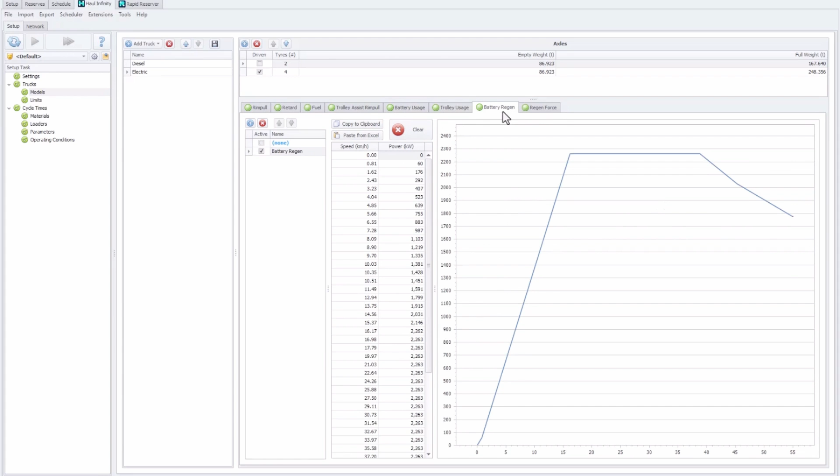Here you can see some of the parameters we use to model electric trucks, including rim pull assist, battery usage, trolley usage, battery regen, and regen force. These are some of the variables that are considered in the modelling process. You can now drill into this data when electric trucks are added to your network.

The latest development in this space allows you to add chargers to your network. Here you can see the simple process of adding a charger and how you can quickly show the impact this has on your mine haulage.

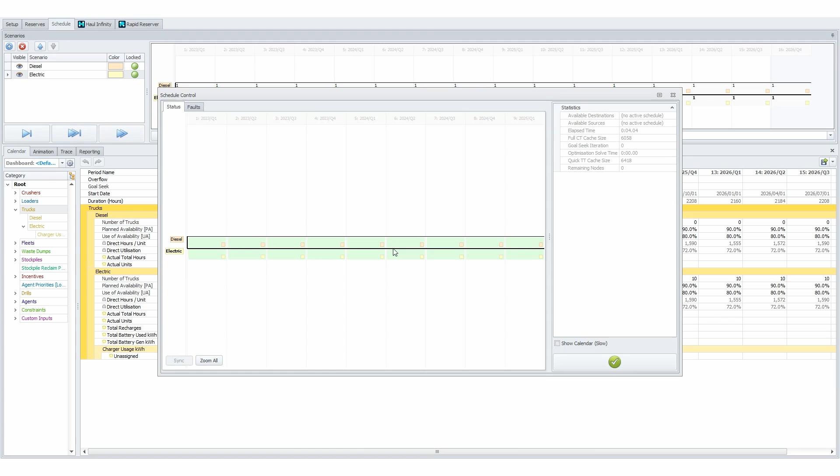Battery electric modelling in Alastri is designed to make it easier to compare your results. To compare both diesel and electric trucks, it really is as simple as clicking each truck type to view the performance over the mine schedule. Once you've run your model, you can have access to the full range of metrics and reports at the click of a button.

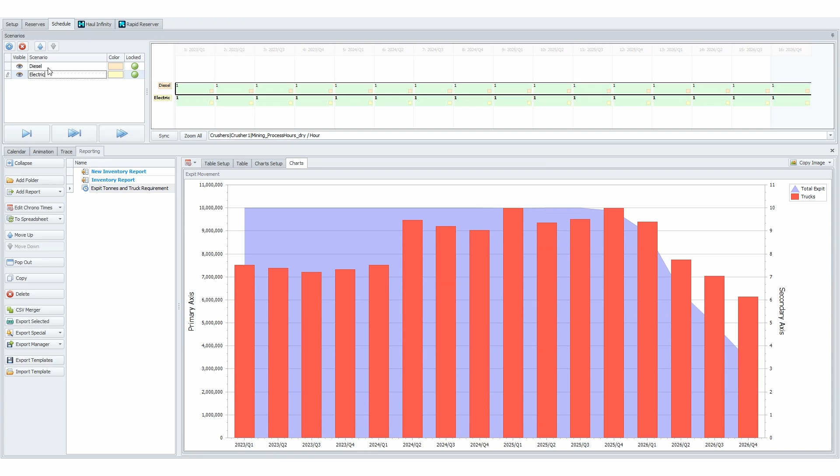Battery electric modelling was developed because a large portion of our user base were experiencing issues analysing, modelling and planning the impact that electric haulage would have on their sites. The existing methods were manual in nature and were time-consuming and were not standardised across all their sites, making it hard to maintain consistency.

Manual calculations are also subject to human error, which can lead to inaccurate results that are time-consuming to troubleshoot. The implementation of battery electric haulage in Haul Infinity makes it much easier to address these issues. However, it's very much the start of the decarbonisation journey for Alastri. We aim to expand Alastri's ESG capabilities, giving you much more confidence as you plan for the future.

While developing the battery electric haulage modelling, we identified that we could improve Haul Infinity to modernise it and better respond to the needs of our clients. Our latest release brings an improved user interface, which is now in line with the other popular Alastri products. Behind this interface, we've invested to both modernise and future-proof the Haul Infinity codebase.

The update will also make it easier to respond to new industry challenges and quickly react to future scheduling needs. One of the things that sets Alastri apart from other scheduling tools is the way the user interacts with the software and communicates data visually.

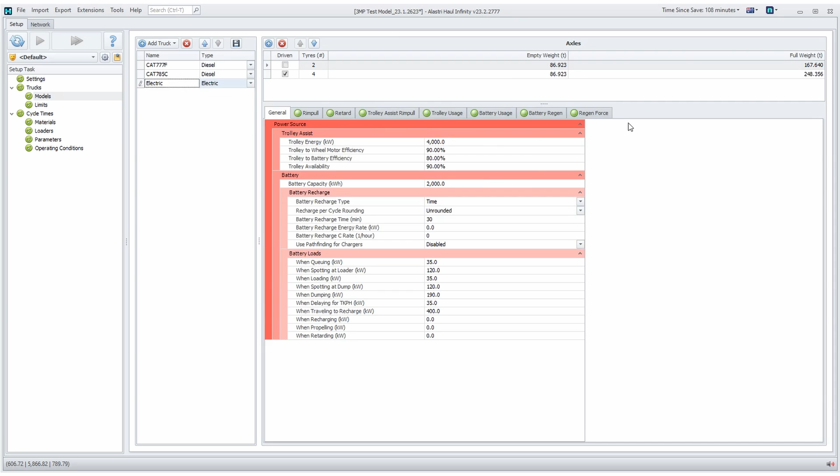One of the first things you'll see is a simpler approach to truck setup. It's now faster to switch between diesel and electric haulage profiles. A nice upgrade is the way your parameters are now accessed and presented. The updated look and feel gives you a broader set of data available from the main interface and better access to your results.

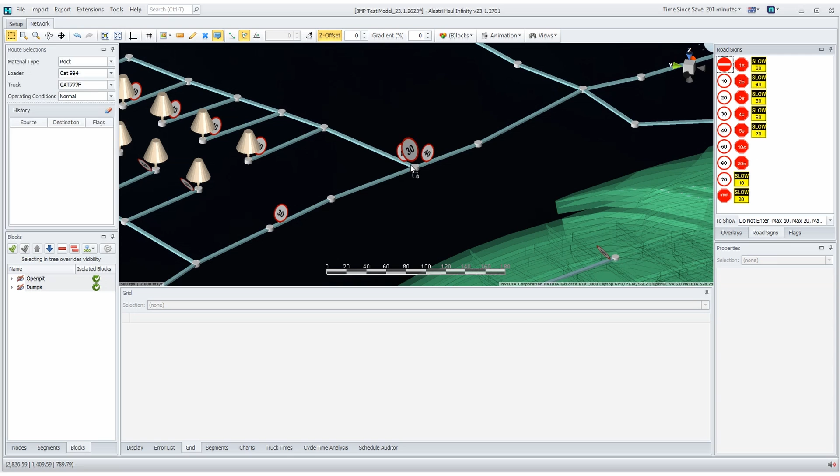Road signs and speed limits have also been revamped. Enjoy easy access to the tools needed to set up your roads in Haul Infinity and more flexibility to adjust things on the fly. The impact of the Haul Infinity display is now redesigned to make it more visually appealing.

You now have more labelling options and colour groupings that will make communicating your schedule much easier.

When new challenges arise, you need to quickly adapt and change the way you schedule. While developing battery electric haulage modelling, we identified that we could improve Haul Infinity to better respond to the needs of our users. Over the past year, the code base that Haul Infinity is built upon has been significantly improved. Part of what sets Alastri products apart is our ability to swiftly respond and implement new scheduling improvements based on the needs of our users.

We felt there was an opportunity to invest now and prepare Haul Infinity for the new challenges that will face the industry. An example of this is the ability to model electric haulage, but there are other challenges on the horizon, such as quantifying the impact of hydrogen fuel cell technology and how that could impact haulage networks. The refactoring work has better prepared the software and our team's ability to respond and meet these challenges. We are confident that this investment has better future-proofed Haul Infinity and will pay dividends over the next planning horizons, helping to adapt the software to deliver the outcomes that you need.

You will now save a lot of time with a streamlined approach to reporting in spatial conformetrics.

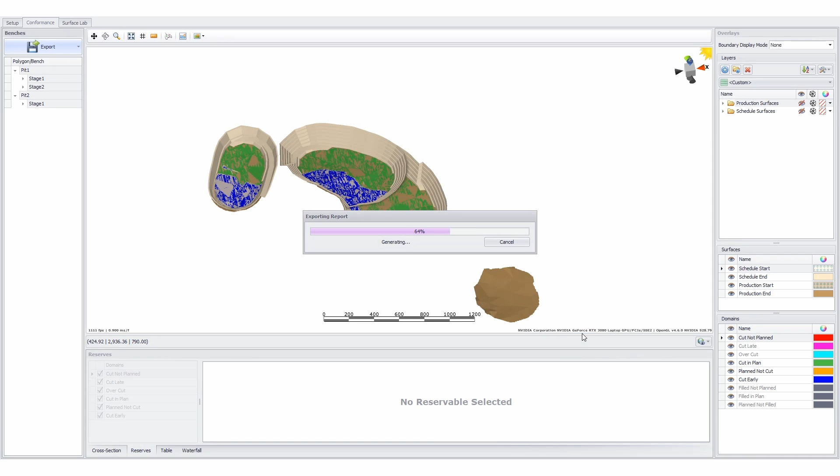What can take planners hours to achieve can now be done in seconds. Once your plan compliance data is ready, you can simply export it directly to PowerPoint. You now get data in the format you need, including many visual components that help you present it in an engaging way.

We feel that the automation of reporting is underutilised in scheduling software, and implementing it can have a dramatic impact on the planning teams. The world is data-driven, and it's vital that planners can take their scheduling work and communicate this effectively. With this latest release, you'll be able to free up your time to focus on the tasks that matter instead of being bogged down by administrative work.

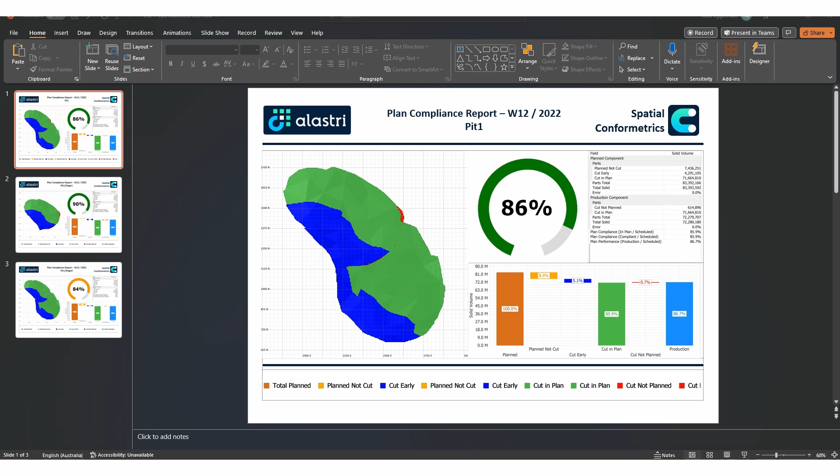That concludes the new features that have been released in Alastri this year. As you can see, our development roadmap is heavily influenced by our dedicated user base, and our intention is to maintain this philosophy into the future.

Much of our development has been focused on improving Haul Infinity's capability to model what the decarbonisation journey will look like for modern open pit mines that process hard rock. Although we have come a long way in a short period of time, there is still a lot of work to do in this space, and we're excited by the challenges ahead.

We are confident that we have prepared Haul Infinity and the wider Alastri product family to tackle these challenges head-on.